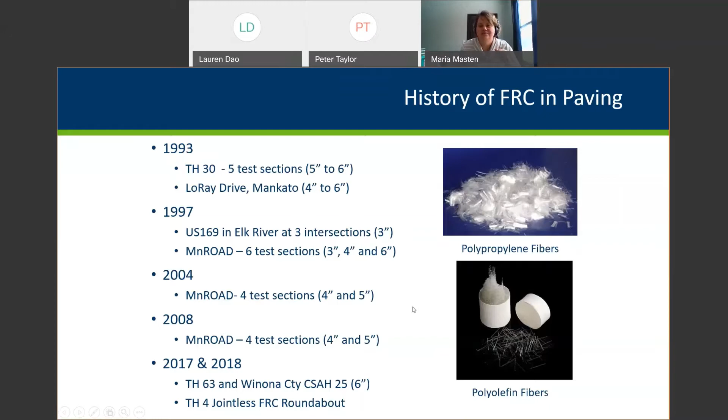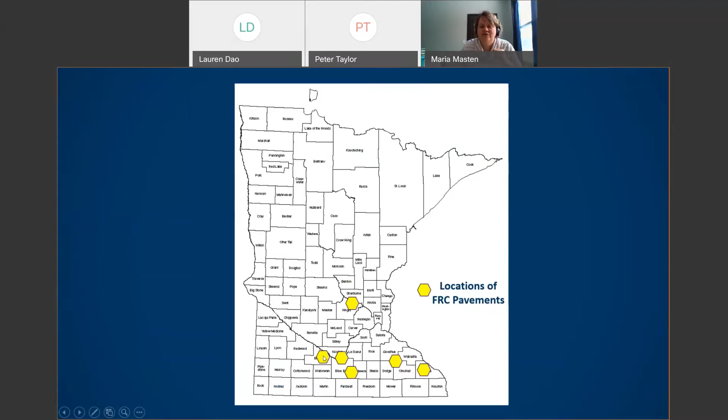Give you an idea within the state of Minnesota where these fiber reinforced concrete pavements were installed. As I said, these first few pavements were installed down in the District 7 area. This, of course, is MnROAD up here. These were the two first network type projects that we installed on the entire length of the project. And then down here in southeastern Minnesota is where this fiber reinforced roundabout is.

So what came of this is District 7 has been using roundabouts as a pavement solution for several years, but one of the things that's been bothering them is the complication of the jointing pattern and getting that all right. And so they really said, well, what can we do differently? That's one of the things we'll talk about. Let me give you an idea.

The roundabout was actually constructed - there aren't really any houses or anything around it, but what necessitated it was a lot of people took a shortcut from New Ulm over here to Highway 68 and didn't want to go all the way in through Sleepy Eye, so they decided it would be best to potentially build a roundabout right here.

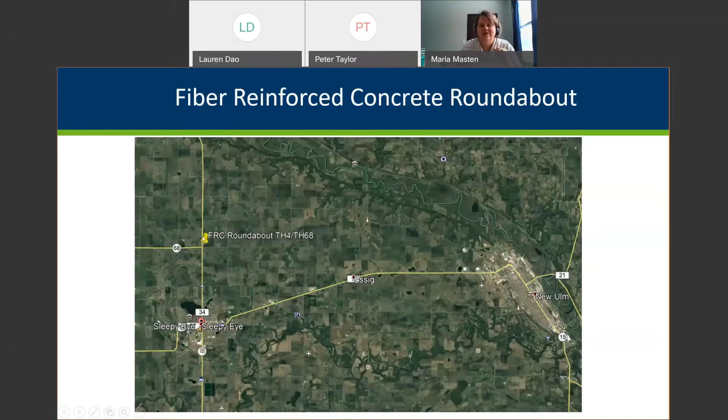This I'm not going to show you, but there's a YouTube video available if you really want to get in and look at the overall project. This is the link for the YouTube video - really gives you a good outlook, though.

You can see that the legs that come in and out of the roundabout are all jointed. And you can see in the actual roundabout that it was constructed without any joints. You can now see there are some cracks in it, and that's definitely one of the things we're going to talk about today.

So why build a jointless roundabout?

As I said, District 7 Materials contacted us with the idea of doing a continuously reinforced concrete roundabout. As I said, they didn't want to worry about the jointing pattern. I had a lot of concerns about the cost and constructability of doing a CRC roundabout.

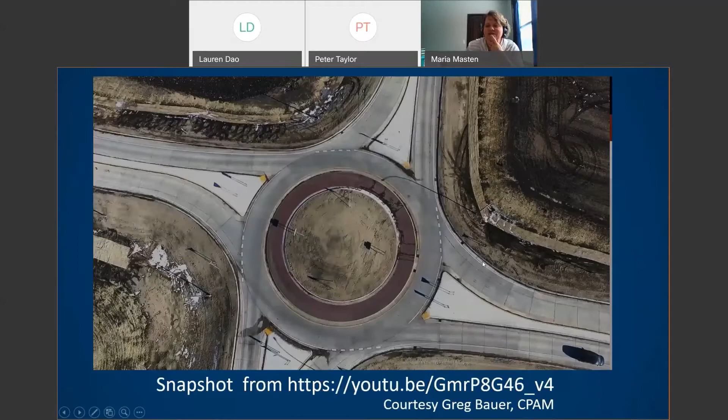Basically, continuously reinforced means there would be steel running in a circle all the way around the roundabout to hold it together. It did seem to me to be maybe not the most cost-effective option, and constructing it gave me some concerns too.

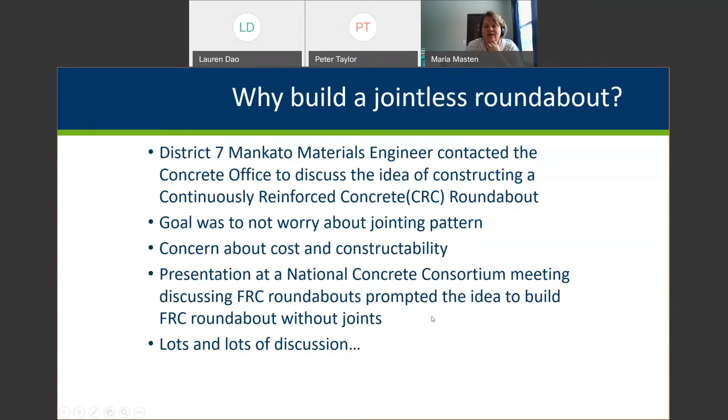There was actually a presentation at the National Concrete Consortium meeting discussing fiber reinforced concrete roundabouts that prompted the idea to build a jointless FRC roundabout. Could the fibers in the concrete provide that load transfer that we normally see with the dowel bars? Lots and lots of discussion ensued, but what we ended up with was not doing a CRCP, but trying this jointless roundabout.

So when we started using fibers, we followed along with Illinois specifications for fibers. However, we knew we needed a fiber that - my term is going to be tougher - that had a higher residual strength than the standard fibers we were using in most of our projects. So we actually required a mean residual strength of 175 PSI when tested in accordance with ASTM C1609.

They had to give us test data to prove the dosage of the fibers was going to achieve this residual strength. Then there were a few other criteria besides C1609 - the length of the fibers and the aspect ratio. Those were two other controlled criteria, but the overlying criteria was this mean residual strength.

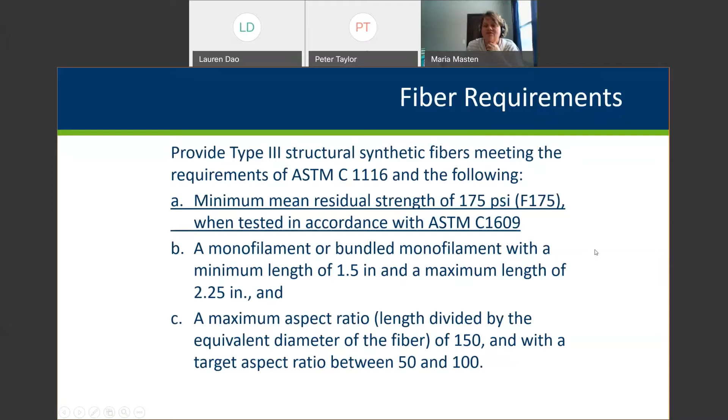On the Highway 4 roundabout project, the contractor was Hoffmann Concrete, and Cemstone was the supplier of the concrete. The contract required test data and a test pour. So they started out and did a test pour.

The initial fibers they submitted did not demonstrate to us that it met the 175 PSI, so they actually had to change the fibers to achieve it. The dosage rate they ended up with was 6 pounds per cubic yard, and the fibers they chose were a synthetic micro and macro fiber.

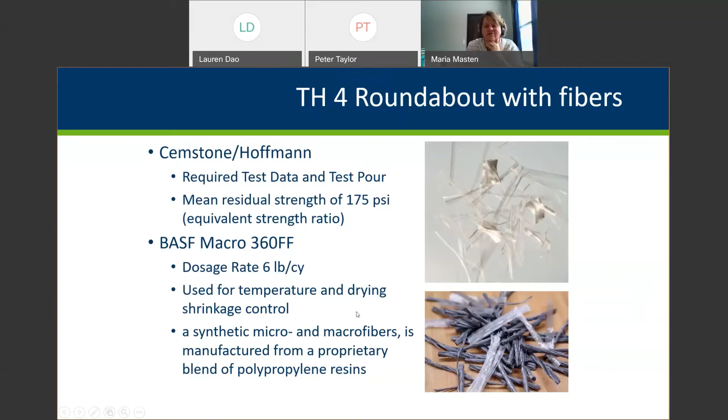That's their end result fibers. With their test pour, the first time they poured it, they worked hard to try and get it finished off in their trial pour. So they made a few adjustments, and we required them to do another test pour. That was the fiber requirement.

We also required a quality control plan for incorporation of the fibers. We've used fibers before, but we didn't want clumping - we just wanted a good sound plan in place for everyone to think about ahead of time. As part of their QC plan, they had to identify dedicated personnel involved in introducing the fibers to the mix, provide the proposed method for adding fibers to the mixer so we could be ensured they get mixed thoroughly, and provide mitigation strategies if unmixed fiber balls were identified. So they did provide a quality control plan.

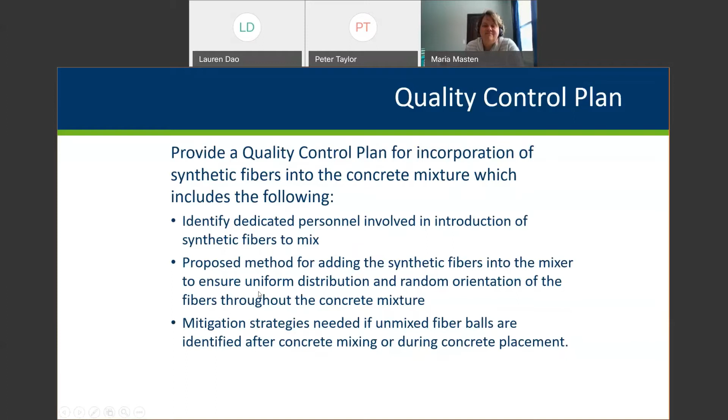We required a minimum 5 cubic yard trial placement, a test pour, with a contractor designed mix. We wanted to make sure before we got out on the road, because we wanted a jointless roundabout, that they had the mix dialed in.

They had to demonstrate their slump, air loss, and workability. Any trial batching was included in the cost of the concrete roundabout.

It was not an additional cost that we provided. We also required that the manufacturer's technical representative be available to troubleshoot any issues with introducing fibers. Adding fibers to concrete isn't new—I think 4 pounds per cubic yard is pretty much every day of the week for a lot of concrete producers. But once you increase the dosage rate, as we saw at MnROAD, it stiffens the mix up and requires additional mixing. So we wanted to work the kinks out.

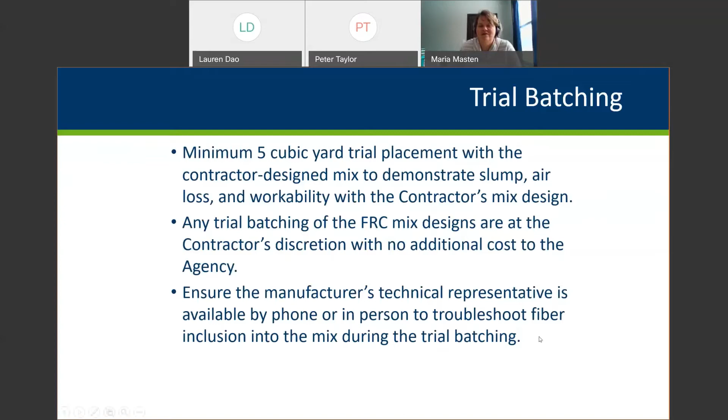The placement requirements in the contract called for one continuous placement. In my mind, they were going to start on one side and go around in the circle. What the contractor chose to do was to truly give me a jointless roundabout. I had already surrendered the idea that I'd have one joint in it, but they truly intended to place a jointless one.

That was one of the requirements of the contract. We had lots of experts across the country knowledgeable about joints and cracking in pavements, and there was a lot of nervousness about leaving this pavement with no crack control and just letting it crack where it was. So the decision was made to provide notches on the outside edge of the roundabout.

They would saw in these notches, 15 inches long at a depth of 1.5 inches. I believe the roundabout was 8 inches thick, every 4 feet on the outside edge. At a minimum, we were attempting to control our cracks—if they were to occur, we'd try to get them spaced out as best we could. We also required them to seal those notches using a hot pour material.

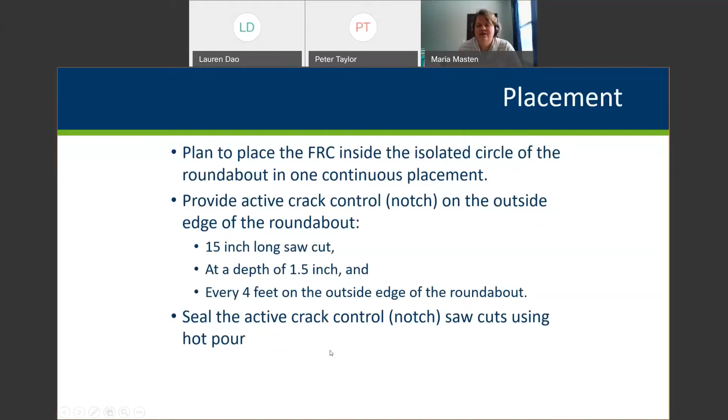One requirement was for one continuous placement, and they did more than I thought they were going to do. Right between the two ready mix trucks is where they started—they had the trucks deliver with 2 crews at the start, so one truck could dump and one crew could work this way around the circle, while the other truck dumped and worked the other way. Very unique, but they set it up so there would be no cold joints.

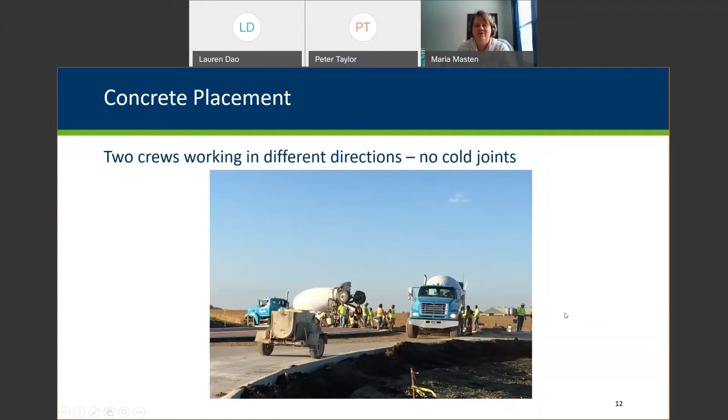We did have a few issues with delivery of trucks, so there was some waiting, but they did build it without any cold joints. These are a few additional pictures of the concrete placement—you can see crew members here, and a lot of people on site to accomplish this. Like I said, there were 2 crews going that way and this way.

The mix was a little stiff—we can talk more about that—but generally they didn't have issues consolidating it. In fact, we didn't really use internal vibration, and I'll show you why coming up.

One thing I had to chuckle about: you're building concrete in a circle, and in southern Minnesota it's wide open in areas, and this happened to be one of those, with wind blowing like crazy that day. The interior truck apron was colored concrete, so depending on the wind direction during curing, it was sometimes easier and sometimes harder. Luckily they had all those guys on site, because a bunch of them held the plastic up so the cure didn't get onto the colored concrete. I was impressed with their ingenuity on this project.

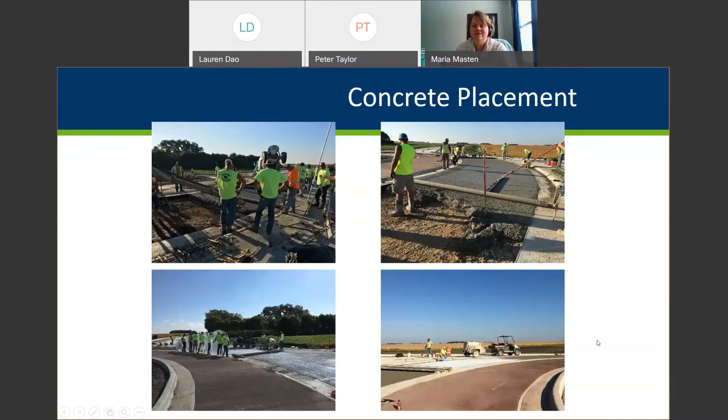This is just a closer up picture of the vibration of the concrete. Like I said, there were a lot of hands on deck. They used a portable vibrator and a roller screed.

They were using a hand vibrator and putting it in, but the problem we were having was that the fibers were nesting. As they put it in, the fibers would grab on the vibrator, and as they pulled out, they would have these little clumps that almost looked like a bird's nest, and that's where we got the nesting term from.

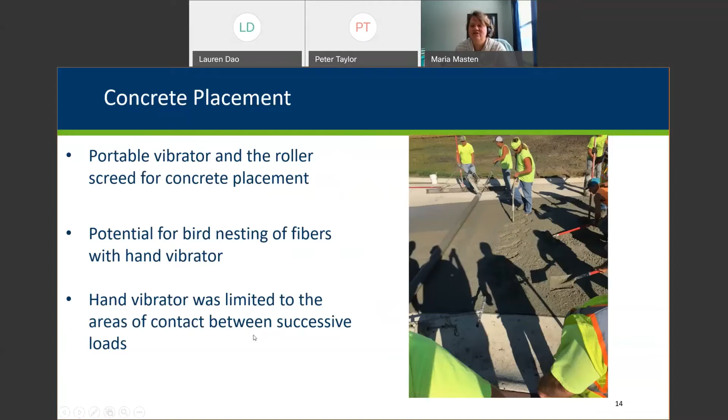So we decided that we weren't going to use the hand vibrators for vibration anymore, but we did use them limited in the areas between the loads so that we would not have that cold joint in there. So there were definitely decisions and adjustments made on the fly as we were doing this project.

This is just a visual of the roundabout. The legs were poured on 9/10, so all these legs were poured and jointed. Kind of funny, the contractor did not put joints in this, and across every one of these really skinny areas in the legs, they actually ended up with cracks. That's what all these little cracks are right here. So that would have been a simple solution.

3 days later - so they did a trial pour, and then they wanted to adjust their mix, so we required one more trial pour, and we allowed them to do their test pour in the legs of the mix.

The in and out of the roundabout does not have fibers in it, but these legs do have fibers in them, just these corner areas, and then the roundabout itself does.

So the roundabout was poured 3 days after the legs were poured, and we did some early analysis and observations of the cracking. 3 days later, R5 and R7 in red here were the first two cracks that appeared visually in the roundabout. One of them, I talked about that notch - one of them cracked off the notch, one didn't. On 9/17, the next day, R1, 2, 3, and 8.

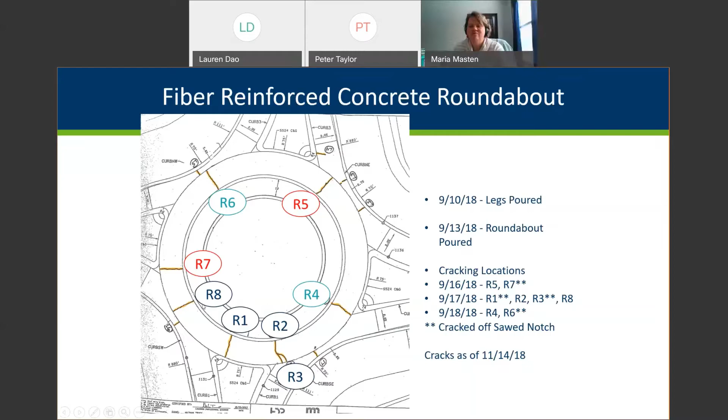...that were observed through 11/14/18 of the first year. And just a few pictures from early on, these first observed cracks.

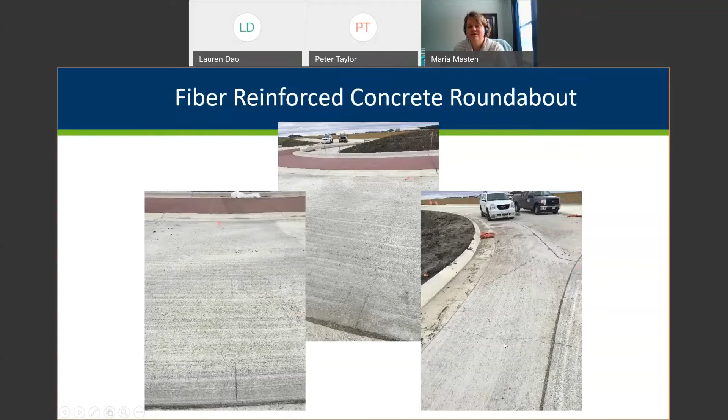So some interesting lessons learned. This is one of the legs - you can see they didn't put any joints in those legs and they cracked as we would expect. So now I will transition it over to Peter to give you an update on how it's performing.

Great, thanks very much, Maria. A good lead in, and it's always fun to hear about the history and the why you did this project.

So same photograph that Maria already showed you. One of the things to point out is that this thing doesn't get an awful lot of traffic, and maybe that's a good thing. But I keep planning to get out there at some stage and have a look.

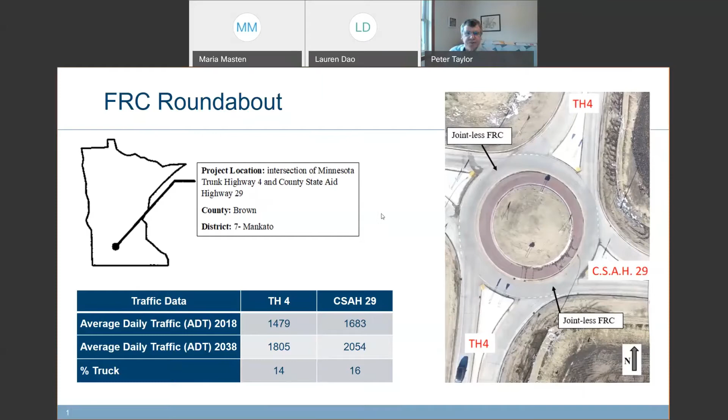Apparently there's a pretty good quilting store nearby, and my wife is very keen to go, but we haven't got there yet, especially last year when we've been locked down. Maybe 2021 we will be there.

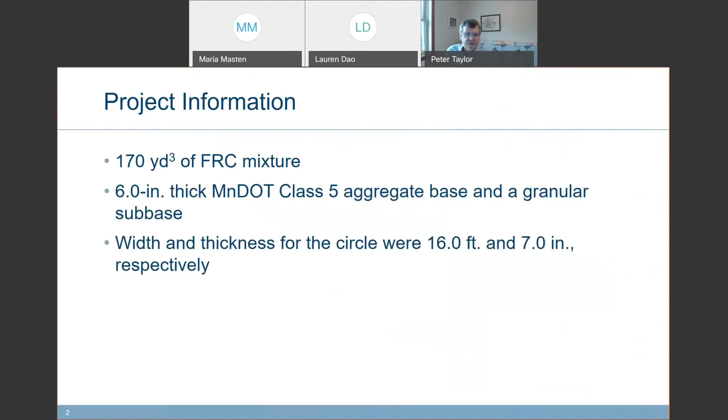So just a little bit more background information: 170 cubic yards of mixture on a 6-inch aggregate base. The width of the pavement was 16 feet and the thickness was 7 inches. Remember that 7 inches - we'll come back and discuss that at the end, I suspect.

All right, and as Maria has already pointed out, basically a whole bunch of concentric circles. The truck apron did have joints in it and dowels to hold it all together. Then the green is the pavement itself with no joints in it. And then the legs and the fillets.

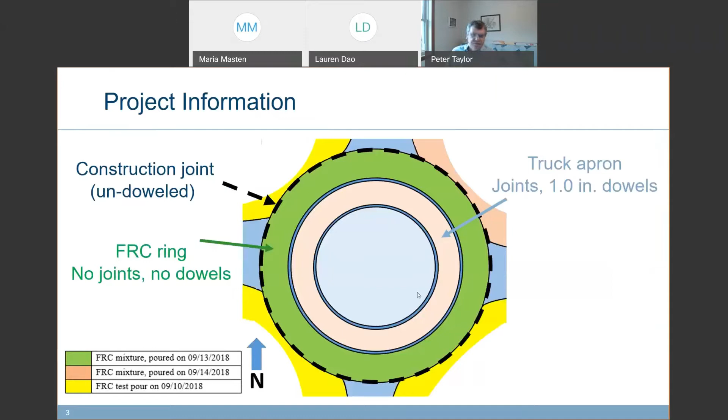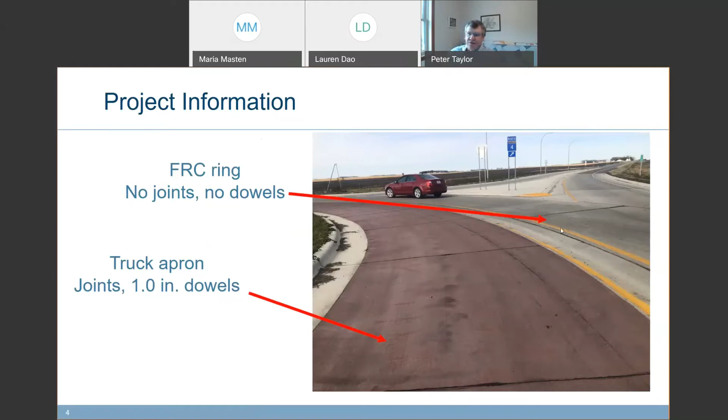Just a photograph of the same pieces, the colored truck apron, and here's the pavement that we're actually really interested in. What is apparent here in this photograph, I'm not sure when it was taken, is again a fairly big crack here, which is very clearly faulted fairly significantly. We've got some numbers on that coming up in a little bit.

A few details on the mixture: about 620 pounds of binder, which is probably about right when you are putting in increasing amounts of fiber. So yeah, that number is not surprising. You got 20% fly ash, which is great for all the durability aspects, ASR, oxychloride prevention, heat of hydration mitigation, all of that good stuff. So I'm delighted with that.

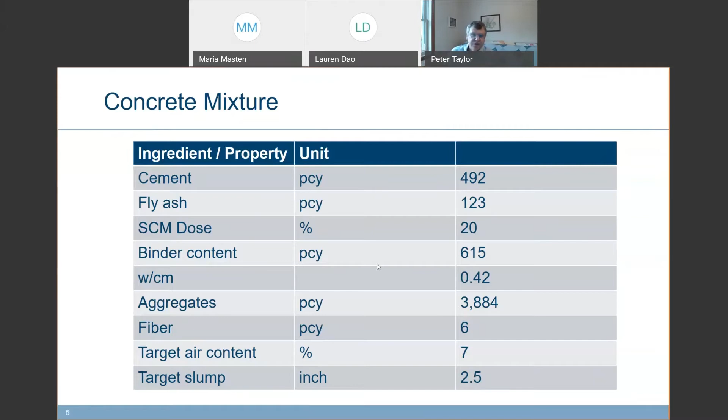The water cement ratio was 0.42 target, which is again in the range of where we normally recommend it. The fiber content was at 6 pounds per cubic yard. Target air 7%, target slump 2.5 inches or thereabouts, which again for a hand place system is a little low, but not unreasonable. The fibers themselves were a proprietary brand from a commercial supplier, and they were a mixture.

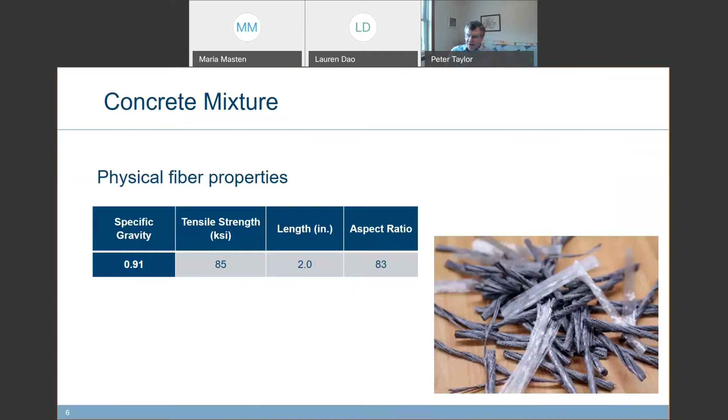Partially cellulose, I think, or different versions of polypropylene, high stiffness and lower stiffness polypropylene. The idea being with the mixture is that some of them will help you with the plastic shrinkage cracking, and some of them will help with holding the main cracks together. 2 inches long, aspect ratio of 83, which are consistent with the DOT requirements.

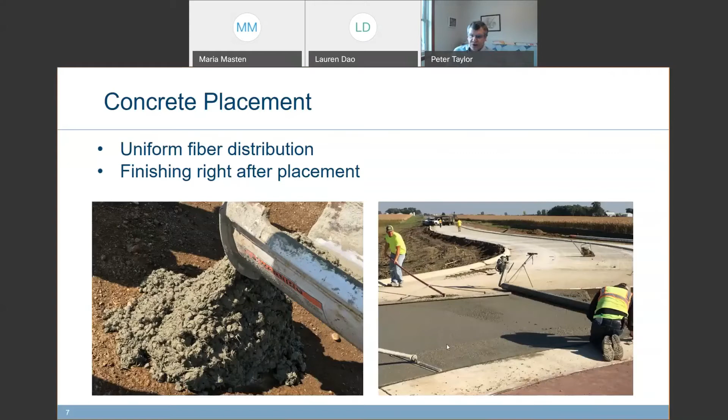A couple more photographs of the construction. So it was, as it came out of the truck, it did look fairly dry. You can see the fibers poking out of it, which is fine. But the finishing actually doesn't look too bad, which is finished pretty quickly, and the finishing seems to have gone reasonably well. I don't think the contractor was complaining an awful lot.

Maria already alluded to the wind was howling and a moderate relative humidity and a moderate air temperature. But it did seem as though that despite their best efforts, some of the curing compound didn't quite make it onto the pavement. And so there were some places in the system where there's some plastic shrinkage cracking happening. Again, this is more of an issue of building on the plains on a windy day.

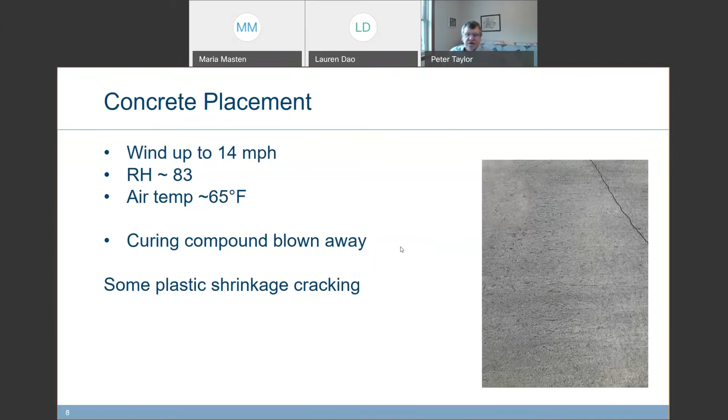Maria also told us a little bit about these notches that were cut all the way around the circle on the outer edge, 4 feet apart, 15 inches long, 1.5 inches deep, which we can talk about it at the end. But one of the things that we want to raise is what would we do different? I'm thinking that if we try notches again, when we've got a 7-inch slab, 1.5 inches may not have been enough, and maybe even 15 inches isn't enough. So that's something that we can debate during the Q&A section.

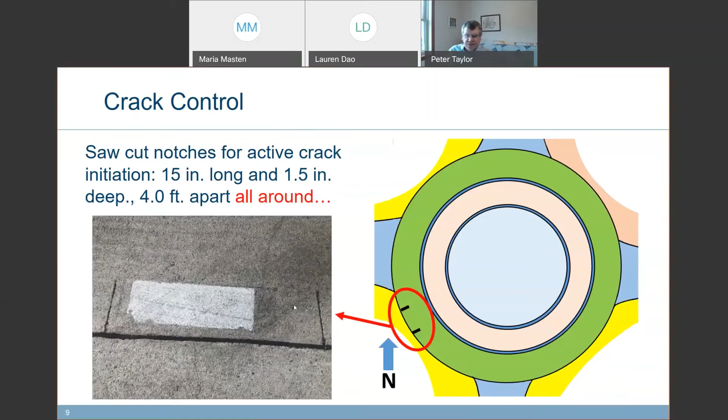Strengths ran at 28 days. Compressive strengths ran at an average of 4,800, which is more than enough that we would normally expect for a pavement type system. Flexural was 590, which again is pretty reasonable for this type of mixture. The one thing that does raise a little bit of a flag is the specified residual strength was 175 psi. The measured results from cylinders and beams taken at the test site during construction was that we were only getting 130 psi.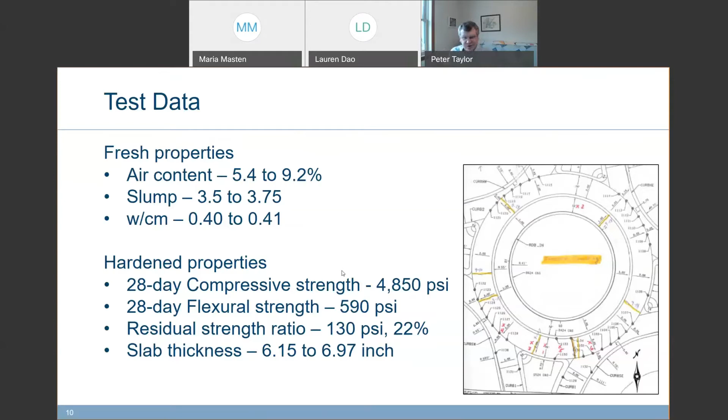So the surface itself is generally pretty good. The contractor didn't complain an awful lot. No signs of any durability problems so far. Things like D-cracking, ASR, freeze-thaw are not an issue.

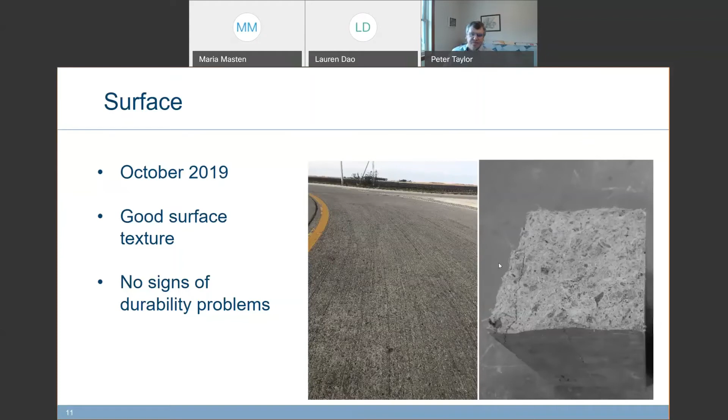There are signs of some of the fibers poking out, particularly here in one of the flexural beams from UMD, you can see the little fibers poking out of it. So there were lots of fibers, and they seem to have been pretty well distributed. The contractor did a great job of making sure the fibers were uniform throughout the mixture.

One of the other toys that we played with, Minnesota DOT had just acquired the MIRA, so they brought this device out. It's an acoustic device that does a really good job of picking up changes in density of the system as a function of depth.

So what this thing is picking up, here at the top end is the surface of the concrete. The bright red area is an indication of the thickness of the slab, typically 6 to 7.5 inches, which again is consistent with the coring numbers. Then there's a secondary reflection, which is the bottom side of the foundation system. So fairly consistent information coming out of this thing. It also does pick up a crack here.

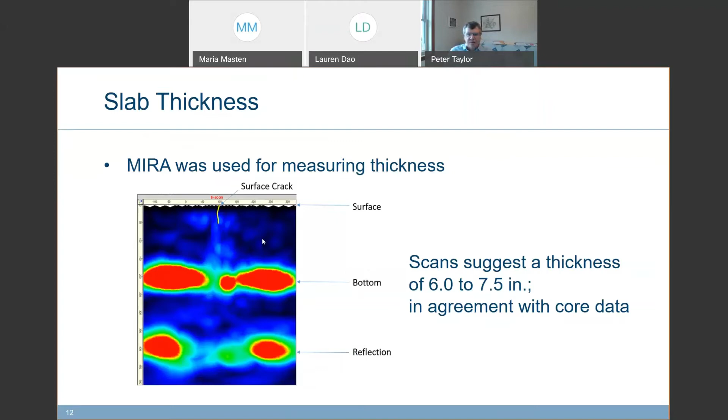So the key question in everybody's mind is, how does this thing crack? I've got 3 images here, and we'll cycle between them just to illustrate what happened. This is the first set of cracks that were observed within probably a month of construction, in 2018.

It's basically the same information that Maria already indicated, that we had 8 cracks right up in the beginning. To me, it's kind of telling that 3 of them are very close to the cracks that occurred in the legs that Maria already talked about. So it's not uncommon, and here we see it again.

Whenever you have an adjacent concrete system with a crack in it, it's not surprising for that crack to reflect through, and that's happened on the northeast corner, northwest corner, southwest corner. Southeast, it's a little bit off. But in this case there were 2 little cracks in the legs as opposed to 1 big one, so that may have helped spread the love around a little bit. So some cracking in the first couple months.

A year later, we went back out there in 2019, and now we had 18 cracks. Again, interestingly, they're not uniformly distributed. There's a concentration of them around the south end and the east end, and then a couple more sort of focused again around where they first started out next to the leg cracks.

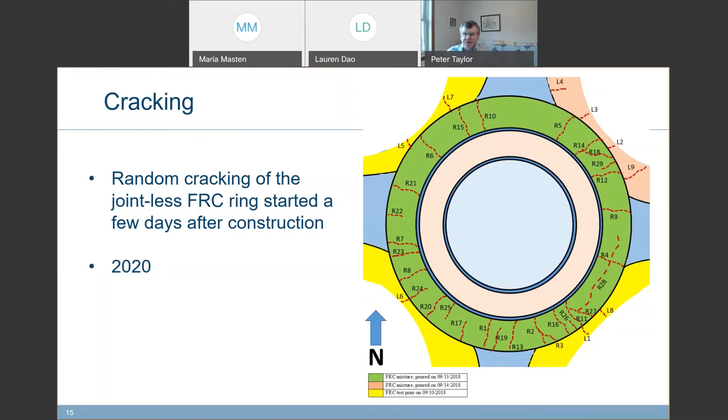In a way, I'm not surprised we've had cracks. These type of fibers, I would not expect them to have sufficient stiffness to prevent cracking. What they will do is help us distribute the cracking. The other hope we have is that they help keep the cracks tight so we're not going to get load transfer issues. The idea being, if we're depending on aggregate interlock, if the crack opens up too much, we lose that aggregate interlock. So the idea of the fibers is that we keep things tight enough that we still have load transfer through aggregate interlock.

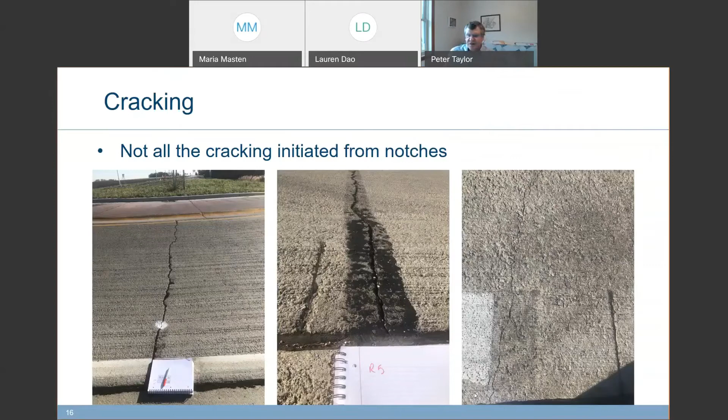So we did have a look at this - a couple of photographs similar to the images that Maria had. Here's the saw cut, the notch, and here's the crack ignoring us and laughing at us. In some cases it did go through the notch, and in others it did not. So here's the data that was collected. The DOT went out and helped us with measuring crack widths, and they also measured load transfer efficiency, and that's in the next couple of slides.

So in year one, that's the blue lines, we can see we've got all 18 cracks already identified. The first 8 are the ones that cracked out in the first couple of months, and those are all pretty big, following that fairly typical model we see - early cracks tend to be dominant and keep growing with time, ending up pretty wide. Here we have a fairly high number of 5 to 10 millimeters in the first year, 10 millimeters, even up to 15 millimeters in the second year.

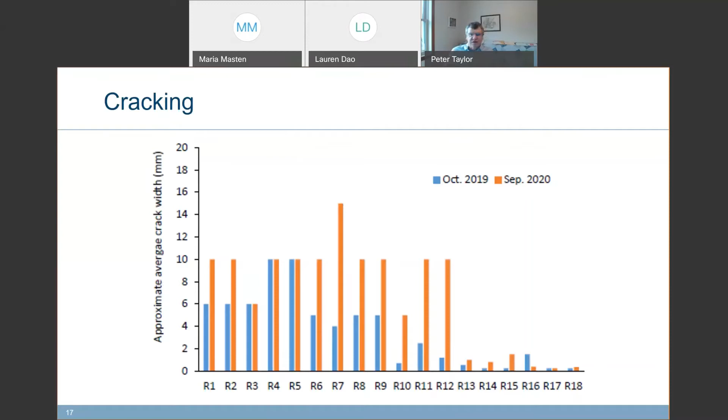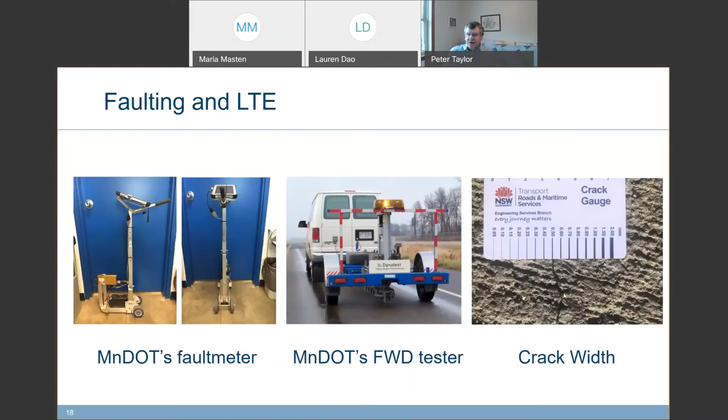That's pretty tight. And if we go back to the previous figure, you can see it's really only the much later cracks that are still under that 3/4 millimeter crack width. So we're getting fairly significant LTE numbers on all of these early age cracks. Whether that progresses and gets worse, or if it's stable from here on out, I don't know.

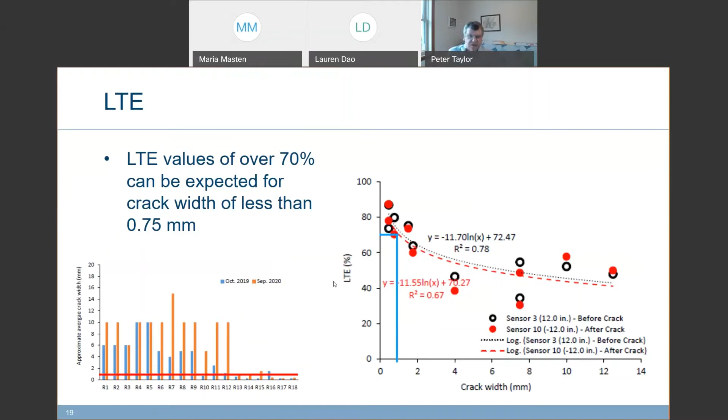The other part of it is, with cracks as wide as this, we may start finding water penetration causing the foundation to get eroded. So we may actually find LTE will get worse if our support system is getting attacked.

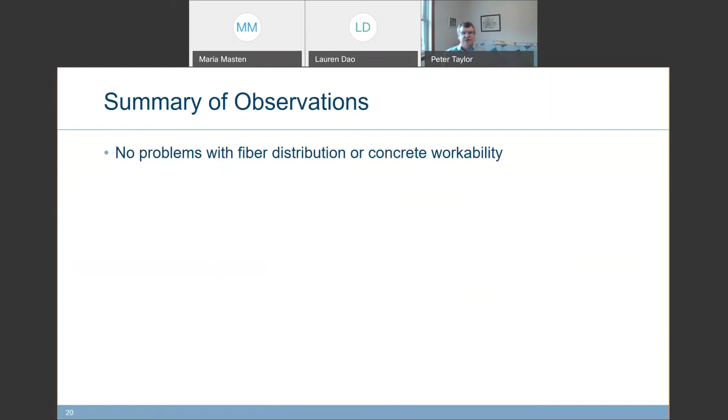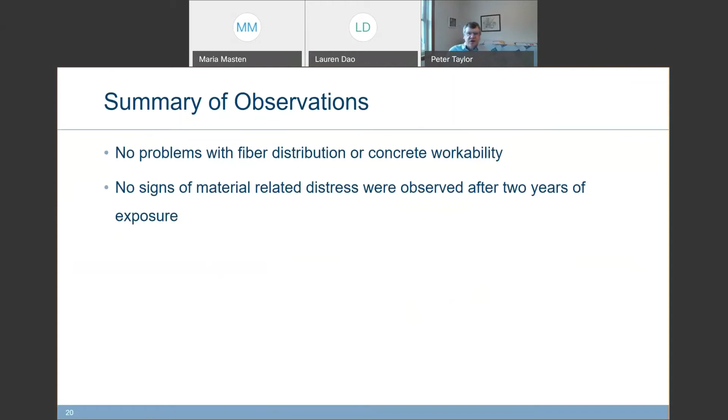All right, so a total summary of all the things we've seen: fiber distribution, concrete workability - the contractor did a really fine job preparing a mix that was constructible, eminently doable, so that's not an issue. No signs of material distress after 2 years - not surprising, given a low water cement ratio, a good air void system, and a stable aggregate. Those are the things that normally worry us. None of those were concerns going in, and indeed they're not a concern so far in the life of this pavement. Crack propagation is interesting.

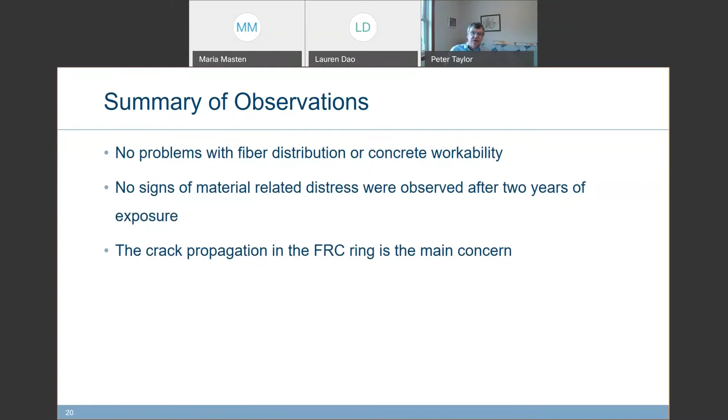As I've already said, we've got quite a lot of cracks, on average about 15, 16 feet apart. Some of them have got to be pretty wide. I didn't plot up the data, but some of the crack widths, I think we've got it here. The crack widths are up to about 10 millimeters, and faulting on some of those very early wide cracks is in the order of 5 to 10 millimeters. Typically 5 millimeters, but there's a couple with 10 millimeter fault, which is actually something you're going to feel when you're driving across that. So that's the one we need to keep an eye on over time and figure out how to do better in the future.

Load transfer efficiency is a function of crack width, and that's not surprising, but again, it's always nice to be able to plot some data and confirm what is intuitively correct.

Only 8 of the observed cracks were initiated from the notches. So again, the success of the notches, not so much. And maybe that's one of the things we need to talk about: how do we motivate those to crack open a little sooner and reduce the dominance of the early age cracks.

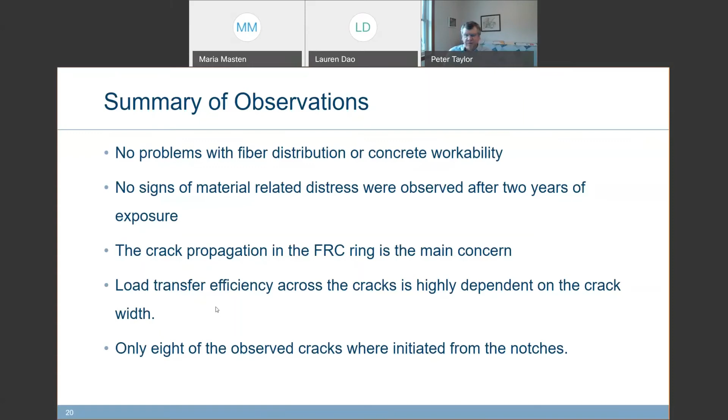So that's the information we have so far. The work is ongoing. We're due to do another analysis in the fall of this year and write up a final third-year report, and that will be the end of the contract. I'm assuming we're going to keep an eye on this through the foreseeable future anyway, just because it is intriguing, and we want to learn from this going forward. The second-year report, Maria, I believe is available on the NRRA website for those who want to look at some of this data. So, I've lost a slide.

Here's where I want to throw it out. The question I asked, and it's worth us debating, let's see if anybody from the audience has any input: Maria, would you do this again? And if so, what would you do differently?

Well, if you're asking Maria first, I would like to try it again. Good. Would I put the notches in?

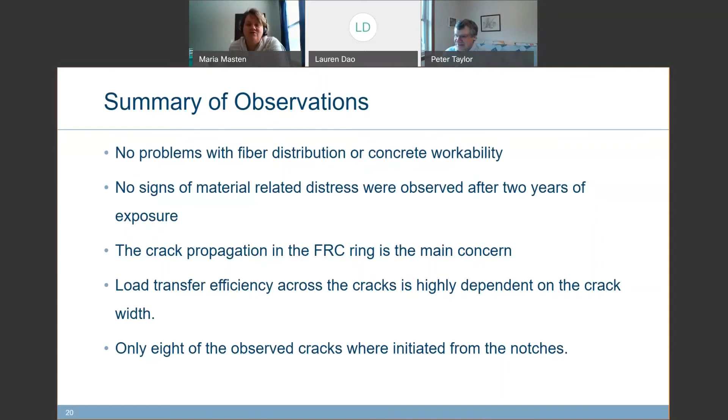Over the course of the last 2 years, I've gone back and forth on that. I do agree that when we originally started, we weren't going to put any notches in. So that was kind of, well, we'll see if we can encourage them a little just by trying something, but I didn't want to take away from the integrity of what we were trying to determine. So putting in deeper notches and forcing the cracks to go there, I don't know, it's counterintuitive. I could go either way on the notches, but I agree if we really want them to serve their purpose, they should be deeper.

Right, I would target T/3. And maybe a little longer. In fact, it's something I meant to try and dig out: European practice on CRCP is to do something like this, and I wanted to go into their records and see how deep and how long the notches they put in are. But they've had some pretty good success with that model. You can have that for the year 3 report. Okay, I'll put it in there, under future recommendations. There we go.

So yeah, I don't know, I could go either way. They did go out, we didn't really mention it, after the first winter, or before the first winter, the district did go out - one of your pictures showed it - and they sealed those first 8 cracks. I do not believe they've sealed the cracks beyond then, but I haven't been out there in the last year and a half either. So Rob may be able to answer that question also, or we'd have to go from the document, from your pictures.